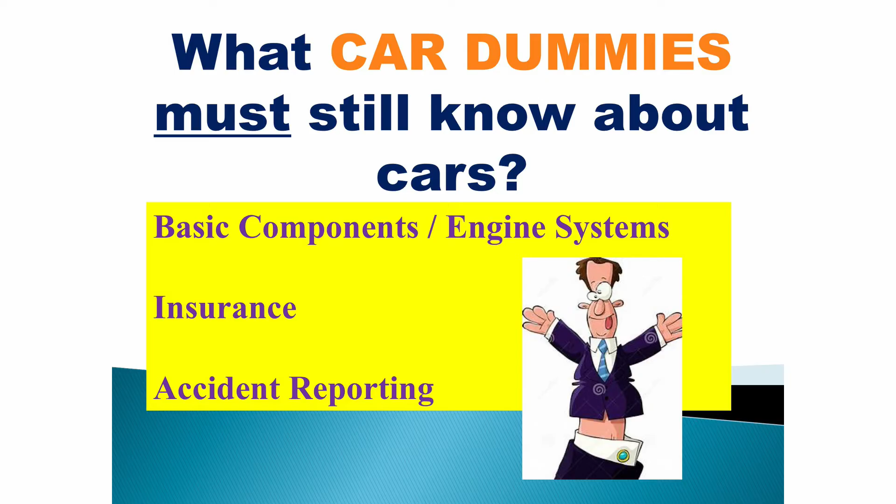Welcome to my video. I work as a vehicle accident advisor, advising drivers what to do when they get into an accident. I was brought up in the car industry. I'm aware that many of us are not car fanatics. Nevertheless, it's very important for all of us to at least have some basic fundamental knowledge of cars, because you can never avoid cars no matter how hard we try. The theme of my presentation is what car dummies must still know about cars, and the topics I'm going to cover are basic components, engine systems, insurance, and accident reporting.

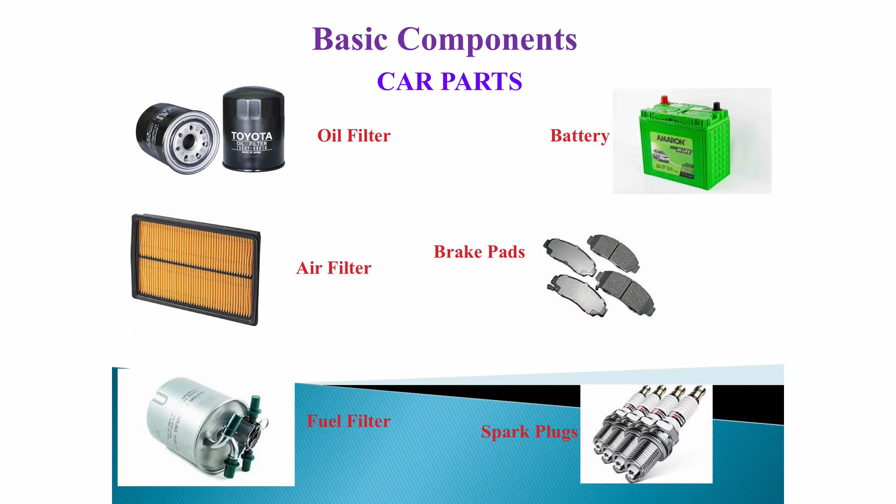The first part I'm going to talk about is the basic components and engine systems of cars. Some very basic car parts we need to know are oil filter, air filter, fuel filter, battery, brake pad, and spark plugs. The oil filter in the car ensures that small particles of dirt in the oil will not reach the engine parts and cause premature wear. It's a very important part in a car, as early automobile engines did not use oil filters. Therefore, along with the low quality of oil available then, frequent oil changes were necessary.

The next important part is the air filter. It removes dust and unwanted particles from the air before it enters the engine. A clogged or dirty air filter in a car can greatly reduce the effectiveness of the vehicle's air conditioning and heating performance. The fuel filter removes impurities, preventing large contaminated particles from entering the fuel system, which can cause fuel pump wear.

The car battery supplies electrical energy to the car, which is used to power the starter, motor, lights, and ignition system of the vehicle's engine.

Brake pads convert the kinetic energy of the car to thermal energy. Two brake pads are contained in the brake caliper with their friction surfaces facing the rotor. When the brakes are applied, the steel plates squeeze the spinning rotor to slow or stop the vehicle.

A spark plug forces electricity to arc across a gap, just like a bolt of lightning. The electricity must be at very high voltage in order to travel across the gap and create a good spark. The spark of electricity is needed to start the car.

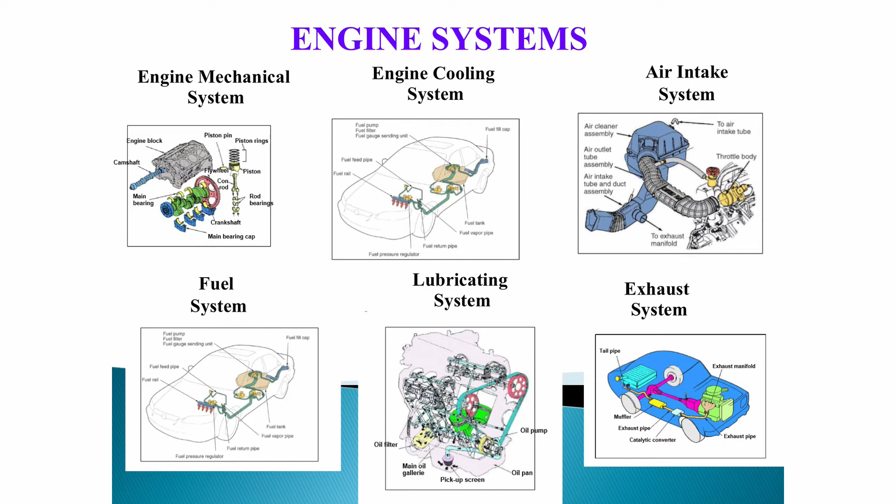For engine systems, basically you need to know that they consist of engine mechanical system, fuel system, engine cooling system, lubricating system, air intake system, and exhaust system. All these will be covered very briefly over here. You really need to read up or do more research on your own if you wish to find out more.

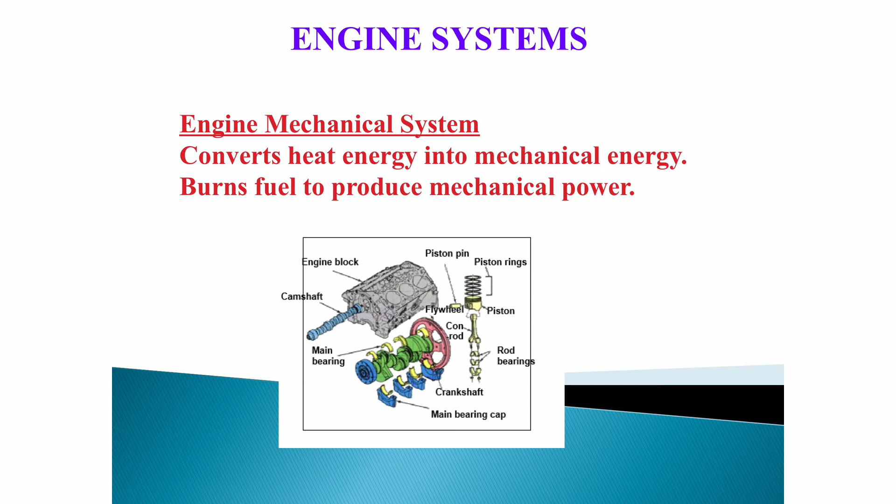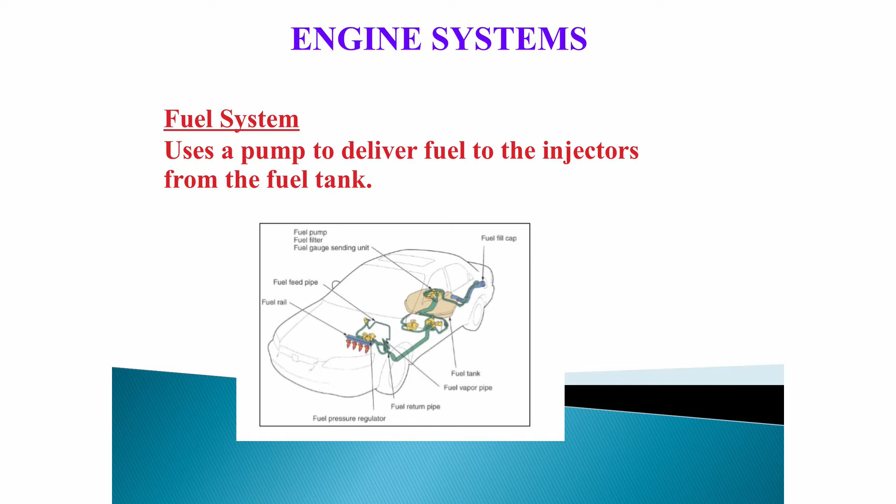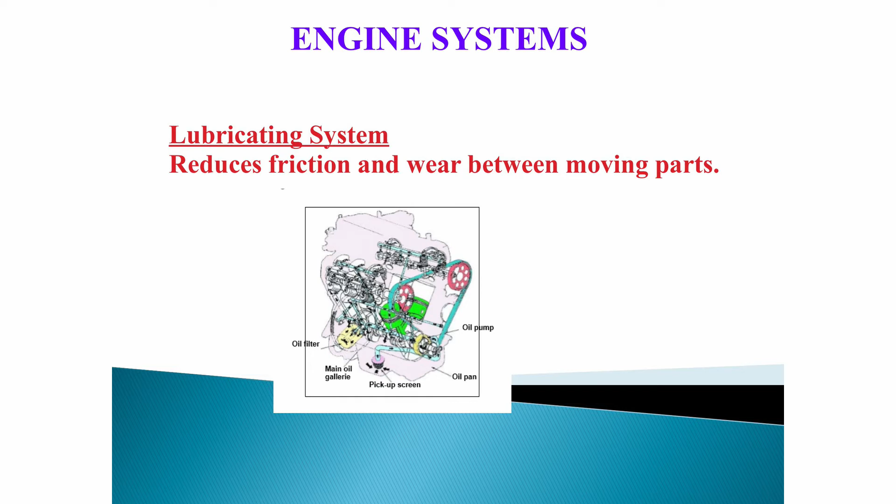The engine mechanical system converts heat energy into mechanical energy. It burns fuel to produce mechanical power. The fuel system uses a pump to deliver fuel to the injectors from the fuel tank. The engine cooling system keeps the engine at its most efficient temperature at all speeds. The lubricating system reduces friction and wear between moving parts. The air intake system lets clean filtered air enter the engine. The exhaust system carries away gases from the passenger compartment, cleans the exhaust emissions, and muffles the sound of the engine.

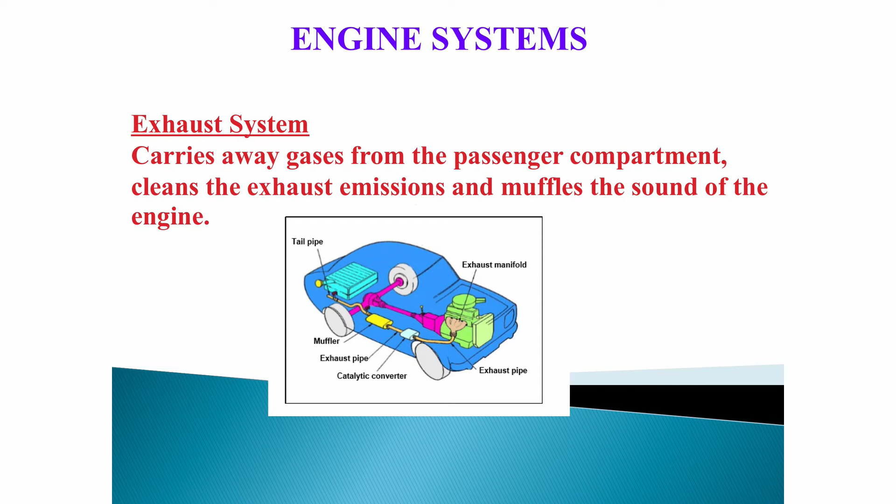So what is engine servicing? It's maintenance done on the car after a certain time period or after the car has traveled a specified distance. The service period or distance is usually given by the car manufacturer. The tasks being carried out are normally changing the engine oil and oil filter, checking and replacing the coolant if necessary,

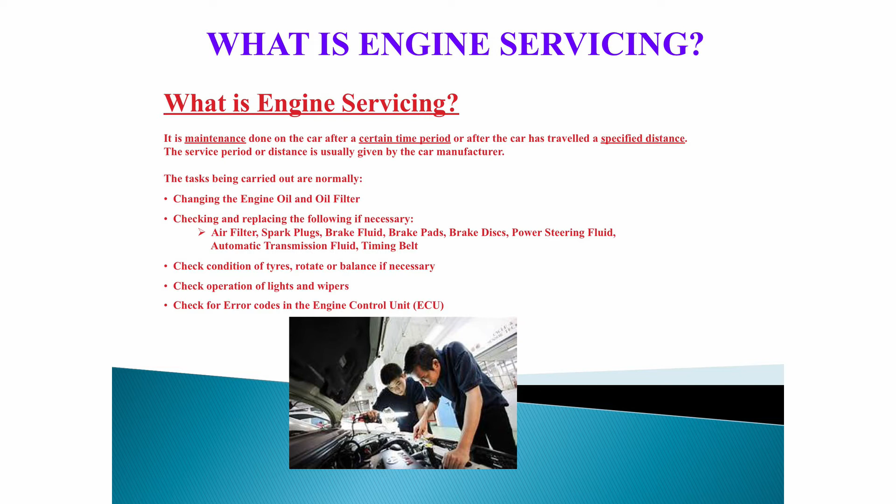air filter, spark plugs, brake fluid, brake pads, brake disc, power steering fluid, automatic transmission fluid, timing belt. Check condition of tires, rotate or balance if necessary. Check operation of lights and wipers. Check for error codes in the engine control unit.

The second part I'm going to talk about is on car insurance.

The first type is third party only. The insurance company will pay for the damages that you cause to others, which is the third party, during an accident. It's the cheapest. The second type is third party fire and theft.

The insurance company will pay for damages that you cause to others during an accident, including covering your damages related to fire and theft. The last one is comprehensive coverage.

The insurance company will pay for the damages that you cause to others during an accident, including covering your damages related to fire and theft, and damages to your own vehicle due to the accident. It's the most expensive. Most banks might require you to get the comprehensive coverage if you have yet to finish financing the car loan.

Other factors affecting cost of insurance include driver's details. They tend to pay higher premium if they are below 26, they have less than 2 years of driving experience, they are male, or they have made a claim in the past few years.

The second factor is vehicle type and model. Expensive cars tend to have higher premium. The third factor is engine capacity. Large engine capacity needs higher premium to insure.

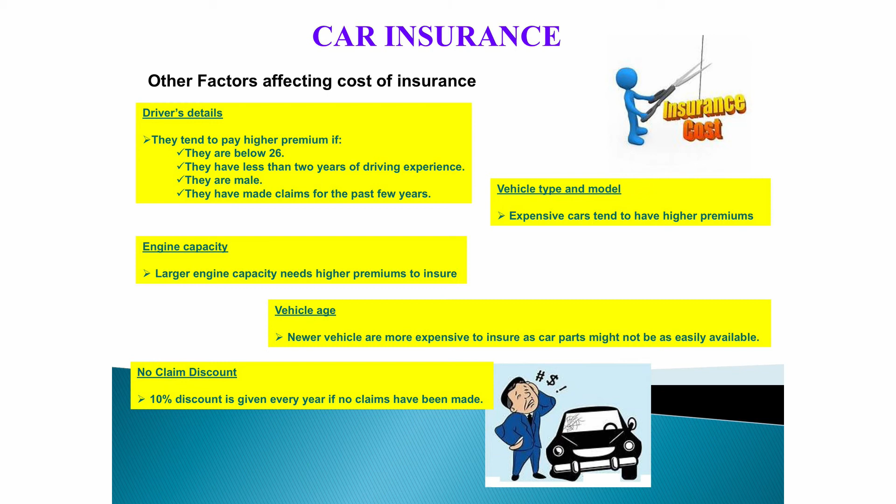The last part I'm going to talk about is accident reporting. Report the accident by the next working day. If the accident happened just before a weekend, which is a Saturday or Sunday, or a public holiday, you may report just after the weekend or public holiday because they are not considered working days.

Late reporting results in your NCD being affected on its renewal. Different insurance companies have different reporting centers. Report to the one relevant for your vehicle.

Items required when you make an accident report are driver's IC and driving license, company stamp if it's a company vehicle, vehicle must be at the reporting center, certificate of insurance, and police report if any.

A police report is needed under the following circumstances: when there's injury, a 3-day MC, involved foreign vehicle, damage to government property, or a hit and run case.

Required information when making an accident report includes accident date, time and place, vehicle details like registration number, make and model, insurance company, and name, NRIC, and contact number of owner.

Next is the driver's details, which is the name, NRIC, date of birth, address, contact number, occupation and email, license pass date, and relationship between owner and driver if they are not the same, weather condition, number of passengers, whether the

accident was captured by car camera, purpose the vehicle was used during the accident, whether it was for private use or work purposes, and third party details like vehicle registration number, make and model, name, NRIC, contact number and address of driver.

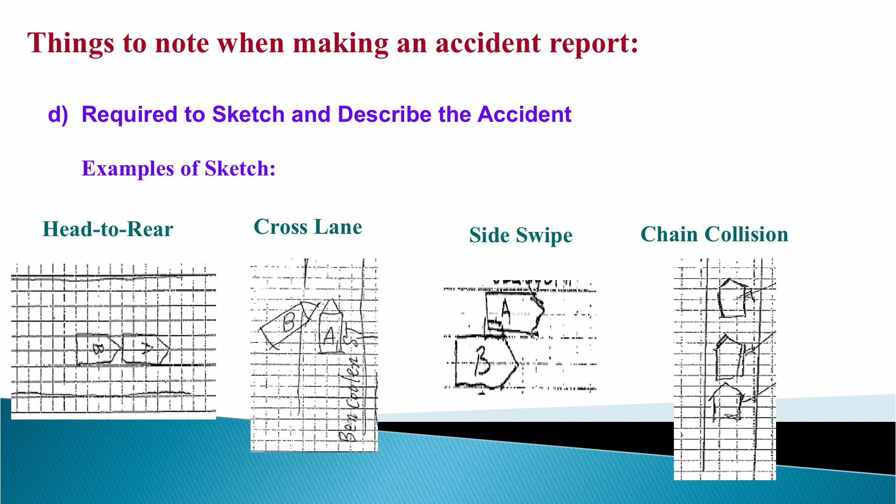You will be required to sketch and describe the accident. Here are some examples of the sketches used in accident reporting: head to rear, cross lane, side swipe, and chain collision. Here are some other examples.